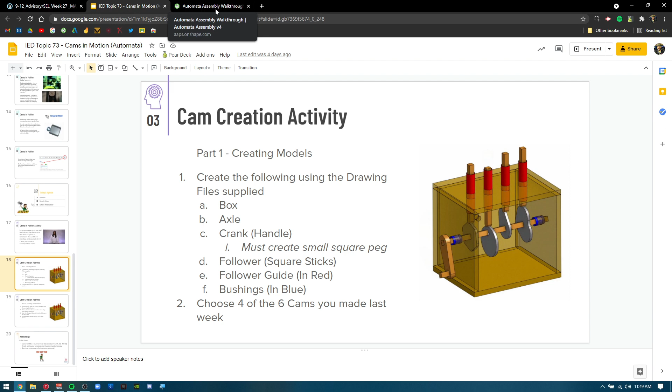So obviously I've kind of already done part one of this assignment, right? So the part one was originally create the following items so that we can animate this thing, and then choose four of the six that you were given as far as the cams.

So I chose these four here. Now remember, mine are going to look a little different because I made mine way before I made that other assignment. So my pear cam, as you can see, is a little taller. My hex cam actually has some curves here.

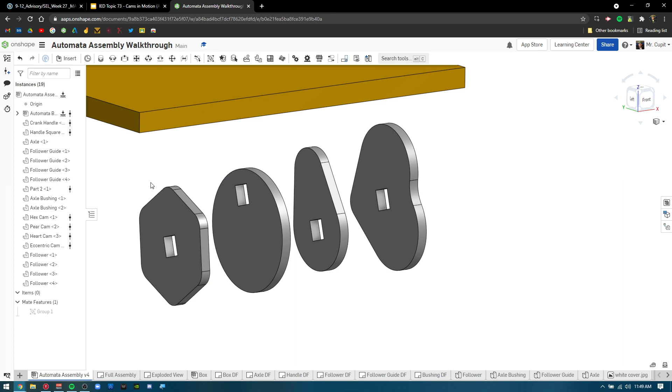If you choose the hex cam, real quick little preview or hint: if you make the hex cam, or choose that as one of the four cams of this animation, make sure you fillet the edges. That's really important. The eccentric, the pear, and the heart for this example are already pre-done for you.

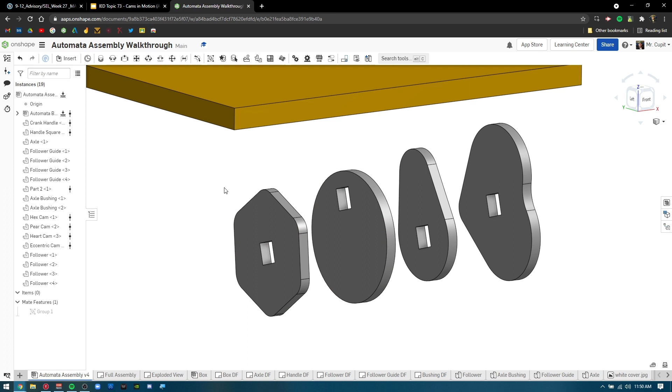But the snail cam as well might give you a little issues. You can't have any sharp edges in animations. That's really important, especially with what we call this new tangent mate. It's really important that we have a curved surface for the path to follow. So that's the first little tidbit.

For time, and just to be conscious of time, I've already put all of the parts in. I've already kind of placed them. They're not constrained whatsoever, so I'm going to walk you guys through that whole thing.

The only other thing I've done up to this point is this back plate that I put in. I made it completely fixed. As you drop this down, I did a little subgroup and I've named each of the parts. I highly recommend doing that. Make sure you name each one: left side, right side, top, bottom.

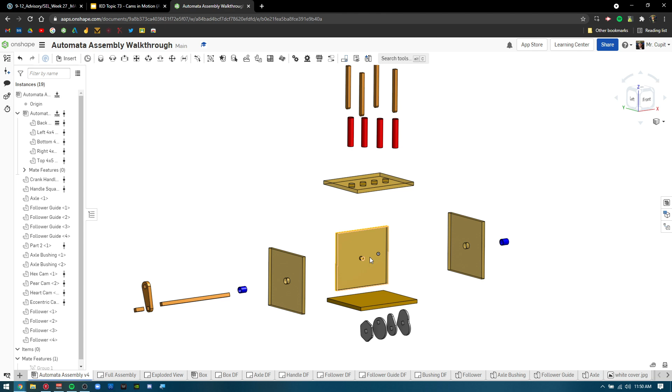Another little thing is this silly little hole on mine. Don't worry about that, you won't have that. I can't get rid of it, it's not a big deal, just ignore it. So I made the back part basically fixed so that nothing can move. That part can't move, but everything else is fully movable.

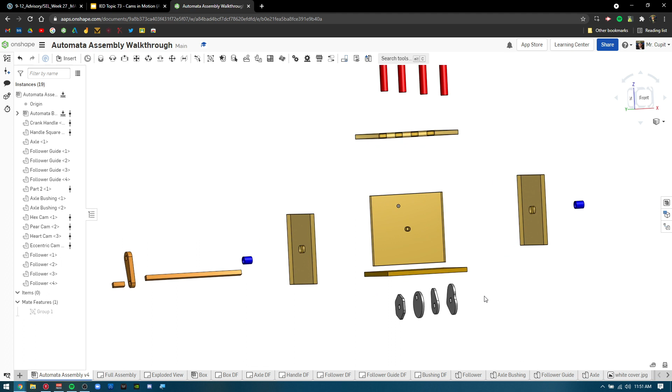So we're going to constrain this thing. We're going to make it so that this whole entire thing is together. So I'm going to start with the box, and go throughout this video and just try to assemble the thing first. After I assemble it, I'll start creating those tangent joints, and then after I'm done making the tangent joints, I will animate it and show you guys how to do all that.

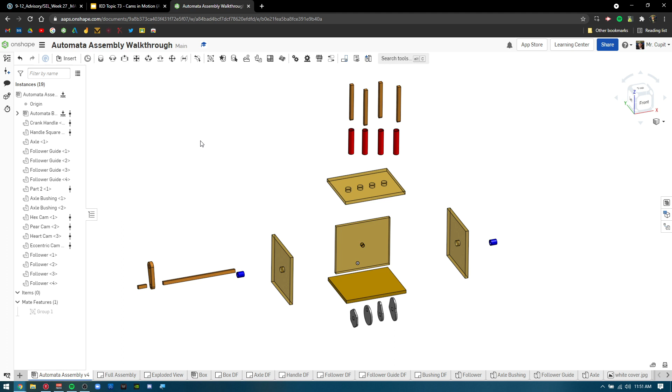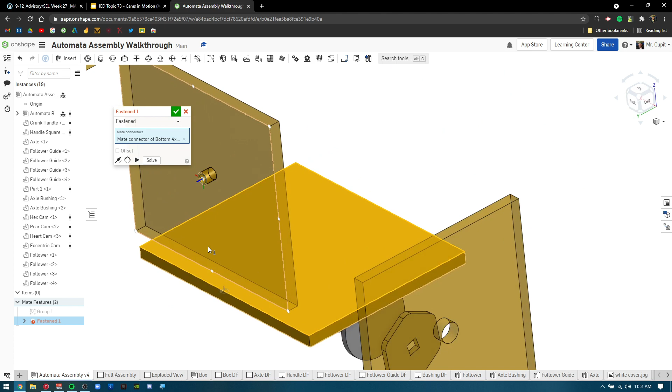So let's get started. Basically, the first thing I'm going to do is put some joints in here. So I have this part, I'm going to go to fasten for most of these. And as you can see, I'm going to use this corner center midpoint on the bottom there, and I am going to place it to actually the bottom of this box.

Rotate, try and get there. And I'm going to go to the outside edge so that it fastens there. Press solve, press the green check mark. And again, now I'm not going to get out of fasten because I'm going to use fasten quite often. So I press that green check mark and you can see I have the first piece in. I have some overhang, which is where these other pieces are going to go.

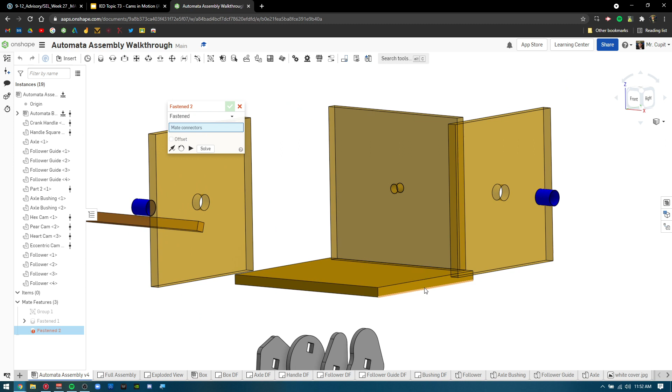So I'm going to do the same thing. Let's do this.

Didn't collect it, sorry. That to this outside one here. And as you can see, it pops in, press the green check mark, moves it over.

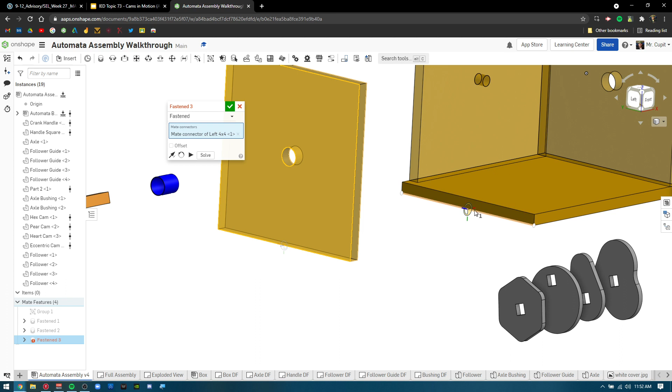Let's do the other side now. I'm using this outside node here to this, zoom in, this outside node here. Again, green check mark so that it finalizes it. And now I have four parts basically for that piece.

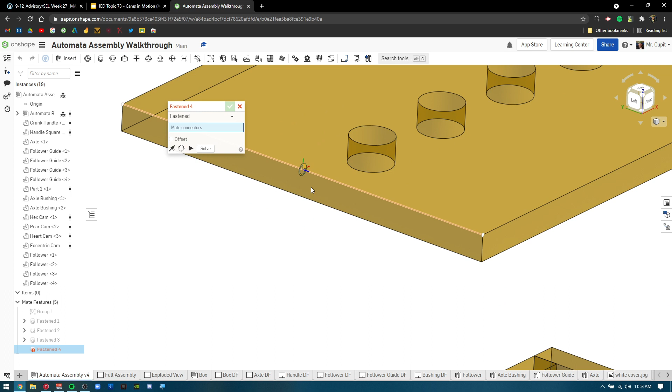I'm going to leave the front open, obviously, because there is no part for that. And then the last one, let's use this side here and bottom midpoint of that outside to the outside piece here. And then again, green check mark.

And now I'm done with fasten for at least the box. So I'll press solve, green check mark. And now you can see, even if I try and move those pieces, because that other piece is fixed, the box is good. So remember, again, this silly little hole in the back, ignore that. You don't need to worry about that. It's completely useless. So I have all my parts.

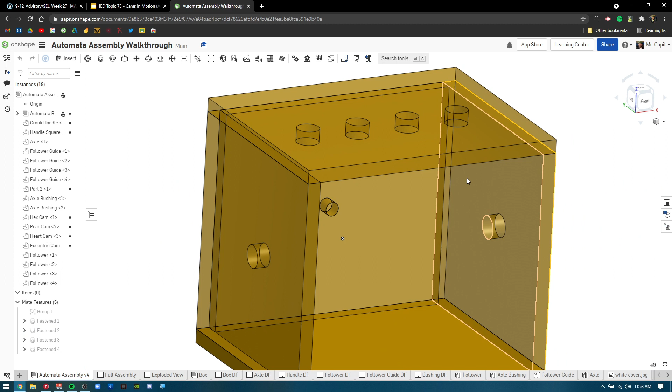Everything is fastened. I'm trying to show to you that nothing's moving, right? Okay, I'm going to go part by part. So the next thing, I will actually use fasten for these bushings.

So I'm going to use, as you can see when I zoom in here, there's 3 points. There's the outside, there's the back, and then there's the middle. I'm going to use the middle because I want it to overhang on both sides.

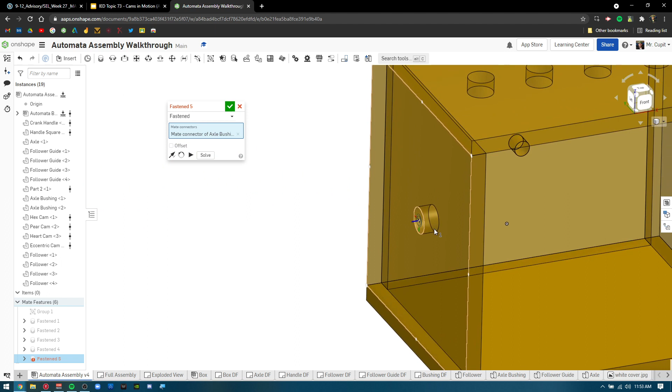So again, same kind of thing. In here, you'll see 1, 2, 3. You got to rotate it sometimes, and I want the middle to be the middle. And as you can see now, it'll poke out on each side. So I can press this green check mark, and it'll move that piece, but still leaves fasten open.

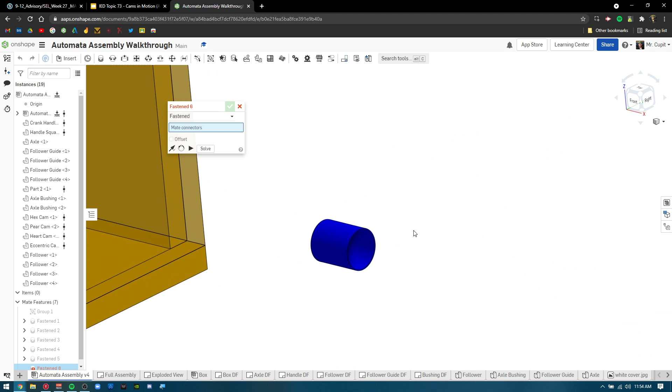Come back over here, same thing to this other bushing that it's called. Come over here and do the center to the center of this. See, sometimes you just got to move the camera around to make it work. Green check mark, and I have that fastened now. So I'm good with those bushings.

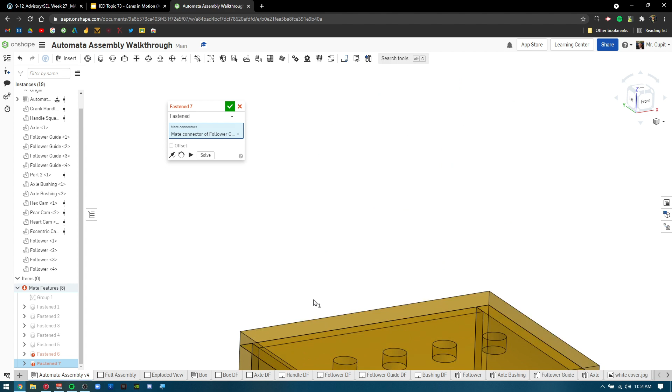Let's put these follower guides in now. So I'm going to start again, same thing. I'm going to use the center, and I'm going to use the center of this hole if it lets me. If it doesn't, I'll just use the top. Oh, it does. Cool, there's the center, green check mark. Good there for now.

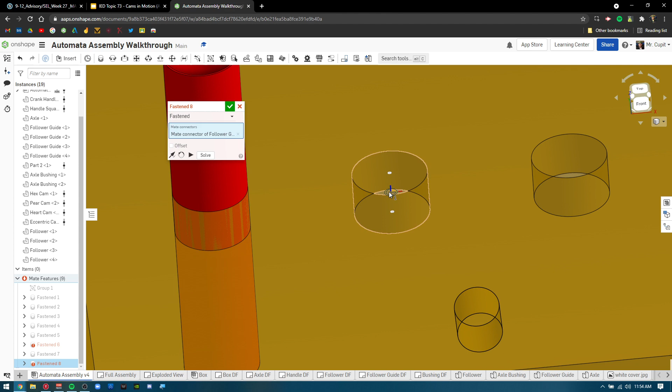Over here, push this in, put all these in just to get them done. Angle it a little bit so that I can see the center. Ooh, popped up for a second. There we go. Just have to play with it a little bit sometimes. No big deal. Go back up here.

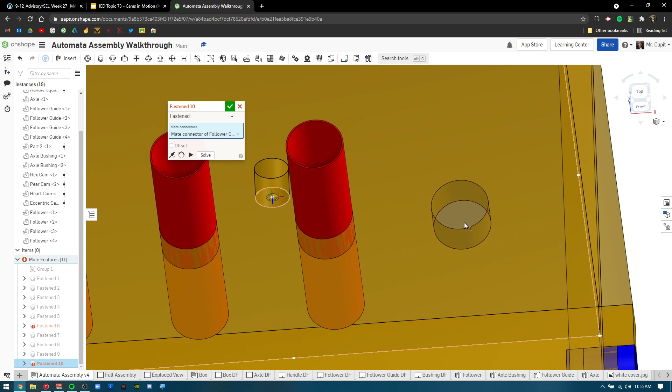Same thing. There's one. Come in, zoom in a little bit. That center one. Good. Green check mark. Red again, we'll see here. Go to rotate a little bit so that this fits in. Come on, show me that middle node. There it is. Green check mark and solve.

So now I have my follower guides. I have my bushings. Now I'm going to start kind of working on this.

Now I say this in the instructions, make sure you make this other little handle piece. I see a lot of people not doing that. Make sure you put that little handle, make this. It's just a square rectangle that's 0.25, and I extruded it just a little bit, maybe an inch, half an inch, something like that.

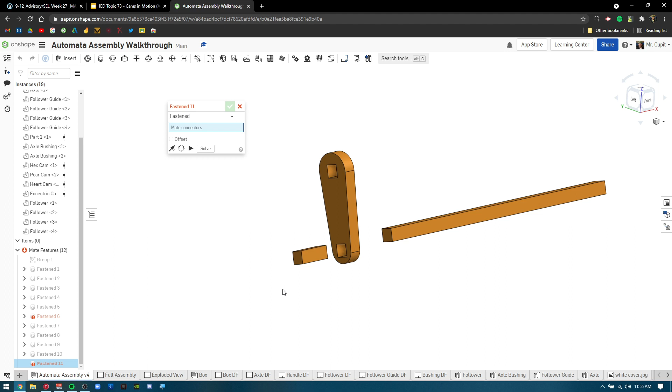I didn't make a drawing file because I figured it was a square extruded, right? It can't be that hard. So I'm assuming that you guys can do that. So make sure you don't forget that little part. And all this is a handle so that we can put that piece in the center of that piece.

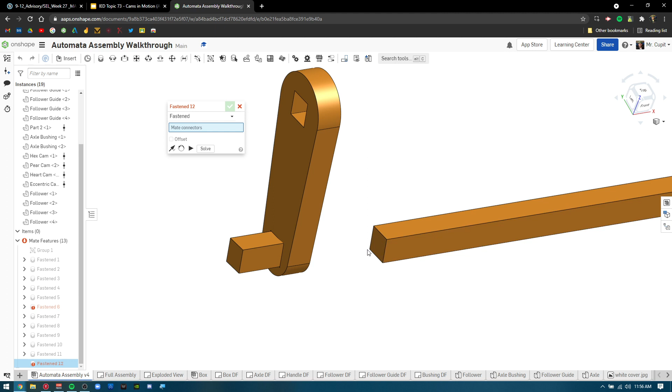Click there, green check mark, and now that's fastened in there and we're good to go. This other piece, we want to put the axle into the handle as well. So this back, click, check mark. I'm just moving my mouse around to find the right node. I'm not clicking anything special, just FYI.

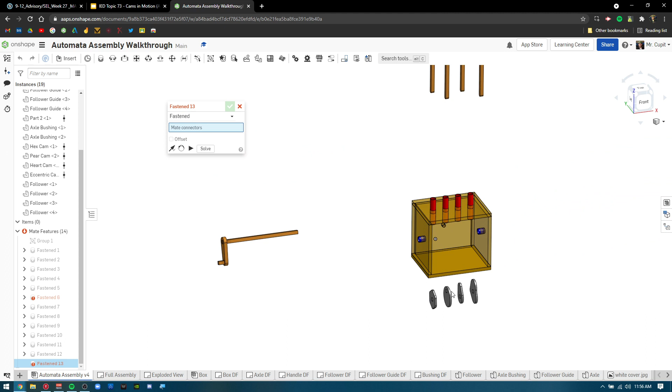Okay, so now before I put the cams in, you can do this either way. It really doesn't matter what order you do this in. You can put the cams on now and then move the whole axle inside the box, or you can put the axle inside the box and then put the cams on after. I'm gonna put the cams on after, and I'll show you why in a second.

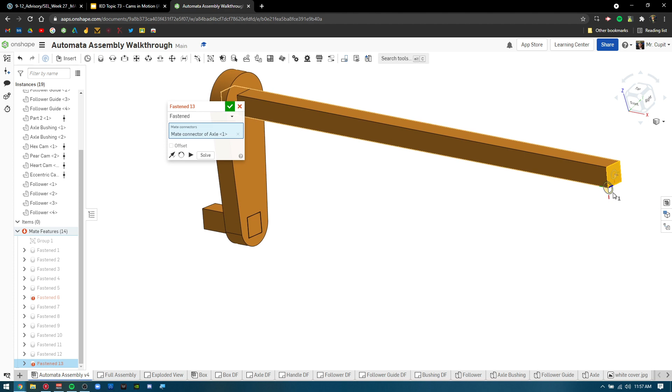So let's do this end. Let's do the center of the axle here. So I'm gonna rotate this. Try and do this face here, and maybe it'll pick up. It doesn't. That's okay. We'll do the end here. Again, I'm trying to make this as short as possible. Do the end center, and I am going to put this into the end of this. We don't want it to be a fasten though. We want it to be a revolute because we want it to rotate around that system.

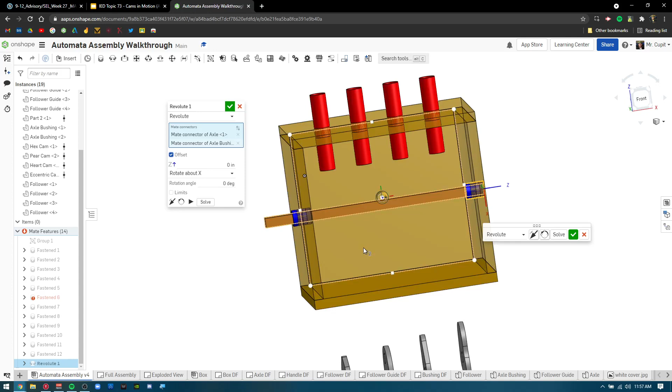So I'm going to press the offset button as well, because as you can see here, it's sticking way out on one end and it's not sticking out at all on the other end. So we want to make sure that that sticks out a little bit. As you can see here, it says Z is this direction. So I'm going to go into Z, and I want it to offset, let's say 0.5 and see what that gives me. Okay, so that's close, probably a little bit too much. Let's go 0.4, let's go 0.3, and just play until you get it right. 0.2 it looks like. Cool.

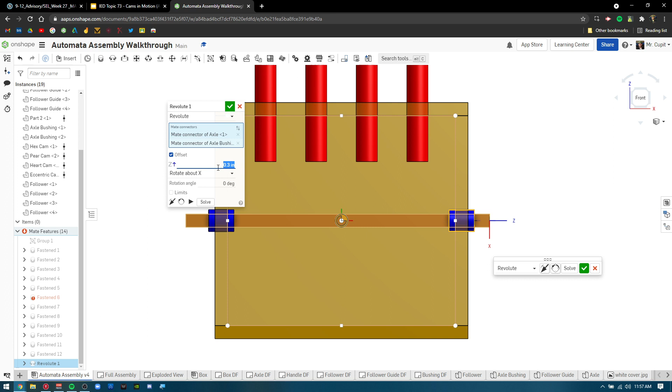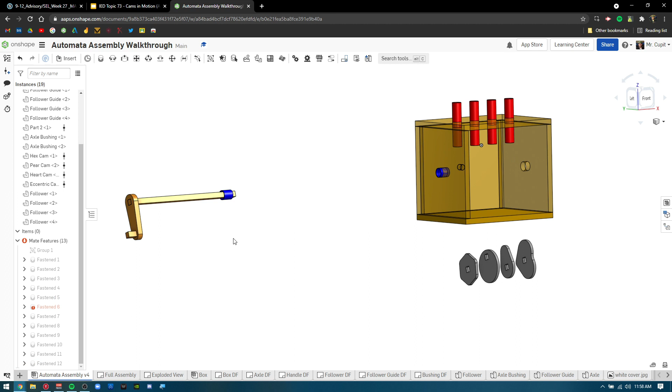I can press the green check mark now, and as I press solve and the green check mark, it should come with that system. Uh-oh, something didn't work. I picked the wrong system, so I'm going to delete that. Here we go. So what I did on accident there is I selected the wrong order. You've got to pick what you want to move, then what you want to move it to. So this piece, is that fastened? Yeah, that's why it's all messed up. So I remove that fasten, and again, you'll make mistakes. I make mistakes all the time.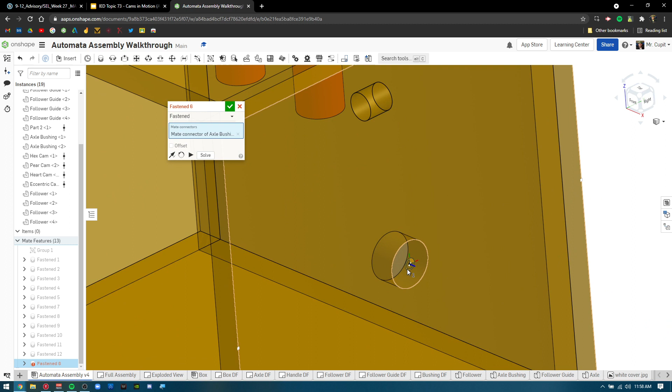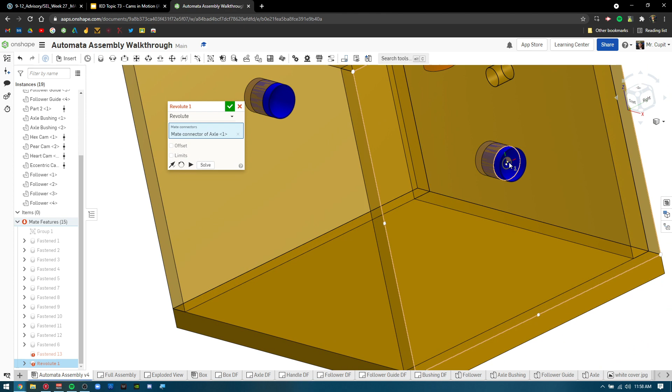I want this part to move to this piece here. Check mark. Solve, green check mark. Now we should be good. Let's check. Good. Okay, so let's try that again. Now we're going to do a revolute, and I want this center piece to revolute inside that hole. And as you can see, again, we need to offset that a little bit, and I think we said 0.2 was the key number there. Green check mark. Uh-oh, something's still wrong. Let's play it, solve, play.

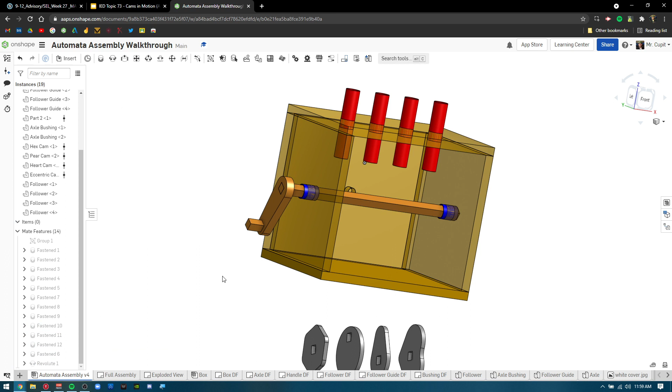Not sure what the fasten is. Seems to be working. I'm not sure why that's looking like that, or what these other fastens are. These two mate connectors, I must have just accidentally pressed fasten. That's okay, let's delete it. Let's delete this revolute 2 because there's not a revolute 2. Let's make sure it still works. Yeah. So I just made a mistake. No big deal. Just delete those. So now I have this. The box is still solidified. All the bushings are solidified. They're fastened, right? And then I have this revolute.

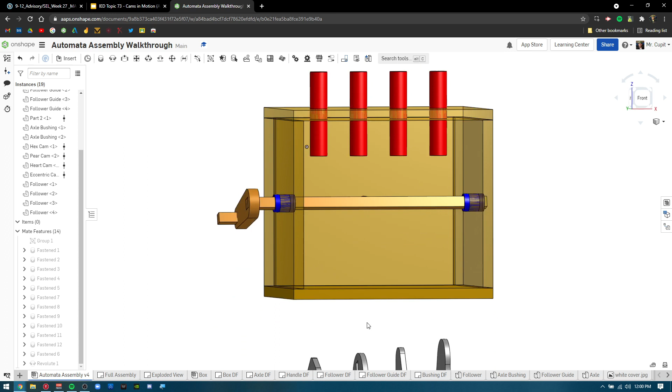So the reason that I chose not to put the cams and the followers in until the end was because of alignment. So the first thing I'm going to do is put these followers inside the follower guides. That'll allow me to position the cams directly underneath them so that I don't have to guess and then go back and change things. So let's go ahead and do a slider because we want the followers to go through the slider. So we go through here and we want the center of this to go through.

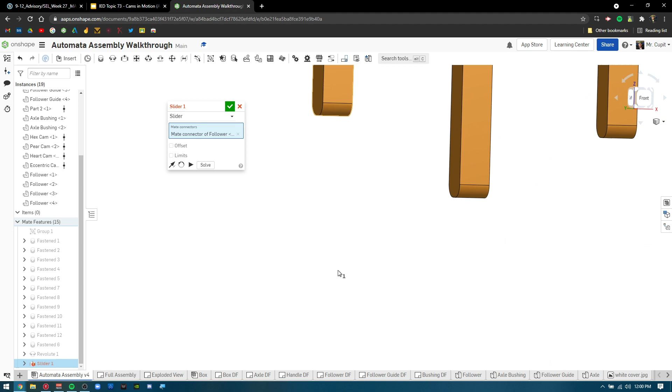You can do a couple different variations if you want. We want it to go in the center here. And you can always check and make sure; you can press play here and see what it would look like and what it does. That might help you just to get a little preview. I'm going to actually offset this up, and you can see Z again is the up direction. I want to not rotate around. I want to, let's see here.

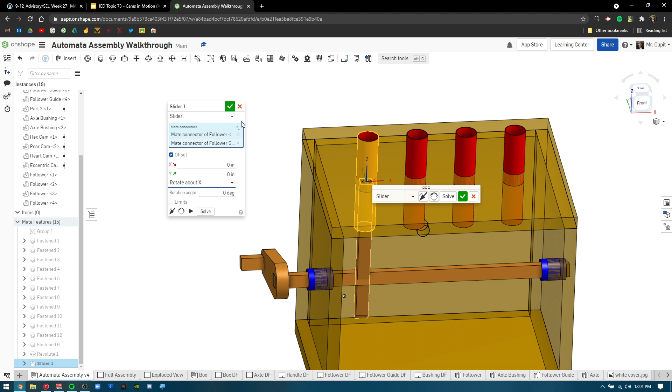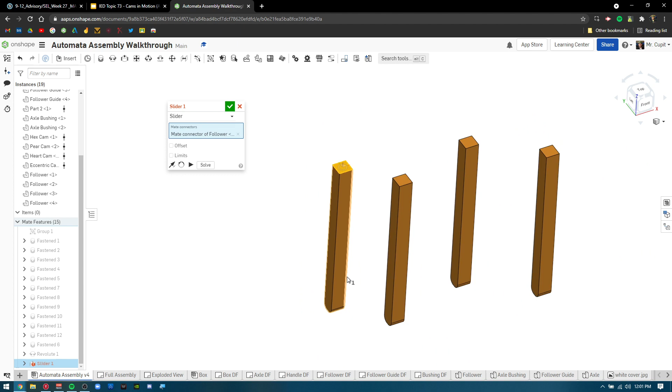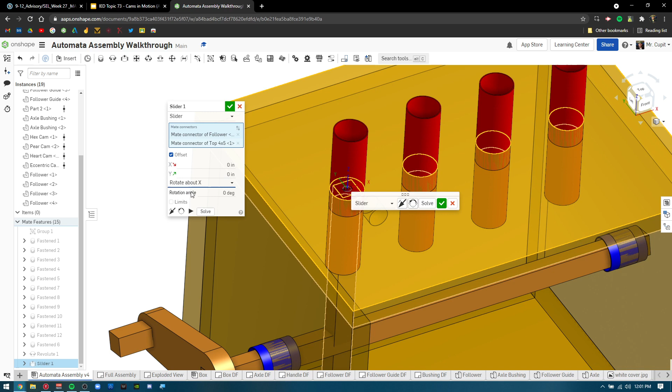Let's cancel that. Let's try and do the center to make it easy on ourselves. So we're gonna go slider. Instead of the top one, here, we can still do the top. Let's do the center here. Okay, so now we can do offset now. We want Z. Is that right? Rotate though. I don't want it to rotate. It's the offset for that. Why?

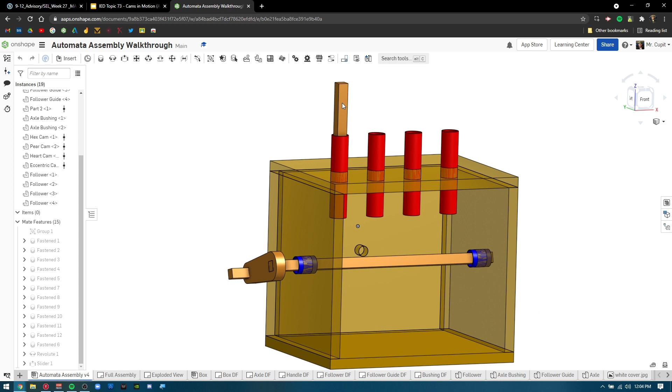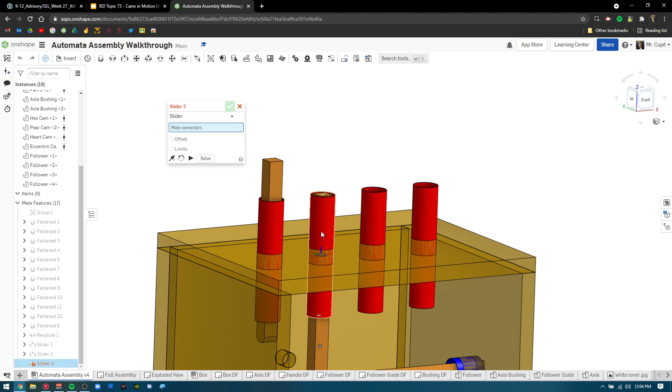Okay, so instead of offsetting, sorry, I had to pause there for a second. Instead of offsetting, I just placed it, and after I placed it, I moved it, and I'll show you again on this next one here. So just make another slider, and as you can see here, go over here, click, and then move that slider, and I'm going to put this one on the top. Click, and green check mark, and you can move these again because it's a slider. You just move it up. Works fine. Do the other two real quick here.

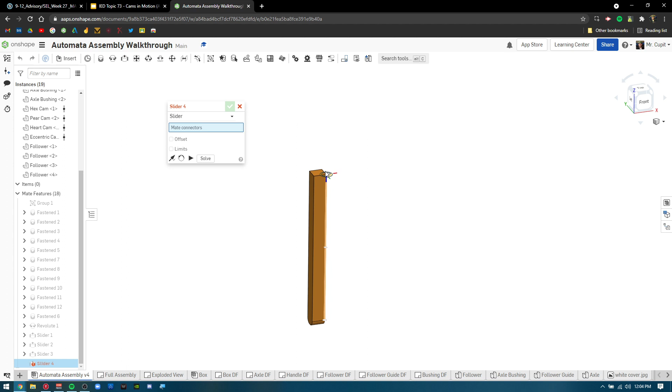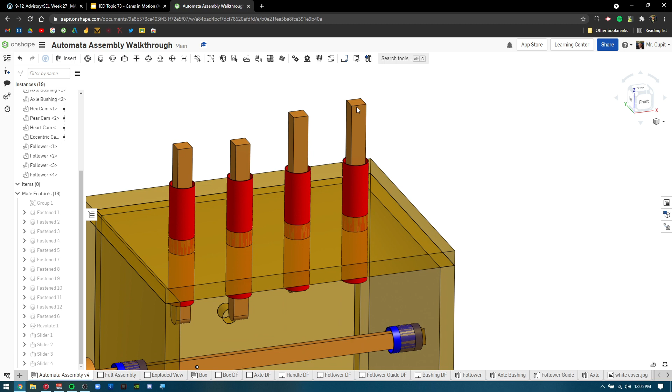Zoom in, try and get that. Center one again. Come over here to this one. Good to go. Green check mark. The last one just because I have slider open already. Top center to top. Green check mark. Solve. Check mark. That other slider, I put too many, sorry. Move those up a little bit, and all I do is I pick them up and I drag them just so that they're out of the way so that when we put our cams in, they're not interfering at all. Just a little bit. Okay, so now we can put our cams in.

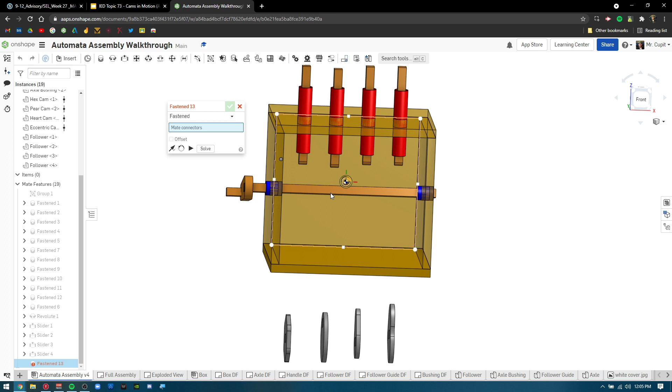So we have these systems, and again, remember where they're squares, they slide right on, and this is huge for offsetting. It shouldn't be that difficult. And we're going to show you here. We want to fasten these cams to the axle. And the reason is because we don't want them to move. We want to rotate the axle, and these are going to be attached to the axle. So we're going to choose this outside surface here, the center of that. And then I'm going to select actually the center of this axle here. So we're going to go here.

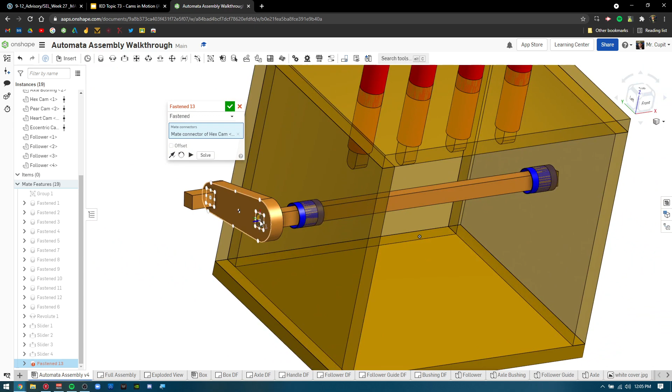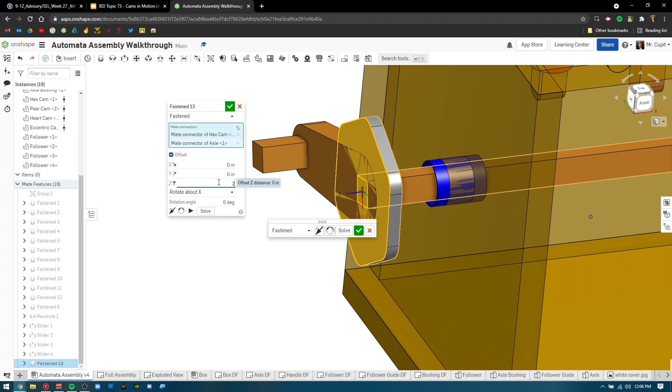You might have some problems, and if you do, I'd say make it easy on yourself and just go to this outside here. And you can see obviously it's way off. So we're going to have to offset this. If you look at the orbit here, you'll see Z, Y, and X. It's on the Z path. So we're going to move this over approximately 2 inches. And this is, again, just a guess, and it's the wrong way. So I'm going to go negative, green check mark. And I'm going to go to the front view so that I can try and line this up. So we want a negative, but obviously that was too much. Let's go 1 and see what direction.

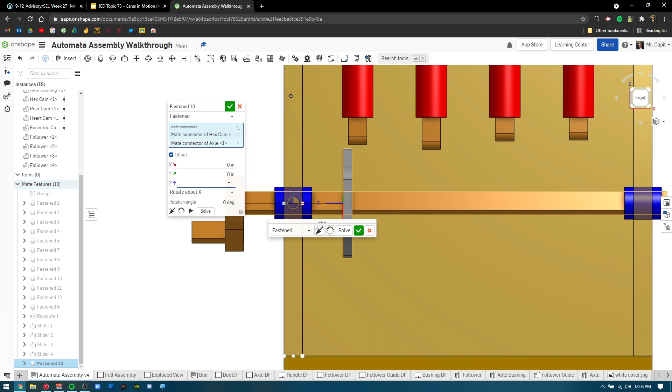Okay, so negative 1.5, let's say. And what I'm doing is I'm playing with this number so that it lines up directly underneath this follower. So let's go 5, 5. So every person's is going to be different, depending on where you pick, depending on what node you choose, all that kind of stuff. I'm going to go negative 1.75, I think is my number. There you go. It does not have to be directly in the center. It can be close, like I see here. And I'm going to press the green check mark. And I'm good there. So I'm going to do the next fasten.

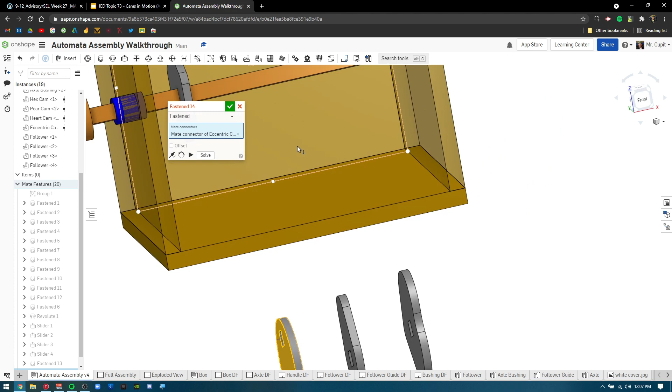And now I'm going to use that original cam to offset from that. And I'll show you why in a sec, because it's going to be way easier. If I choose here, it'll look like it overlaps that. But if I go to offset and again do a Z and just do 1 inch from that in the negative direction, you'll see here that it makes it exactly 1 inch apart, which then puts it in the center of that one. So I can press the green check mark, do another fasten again.

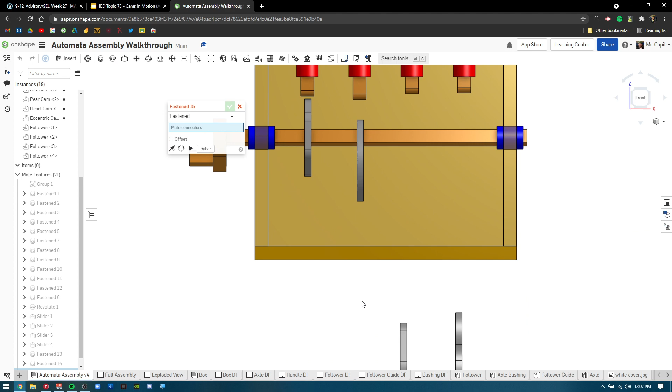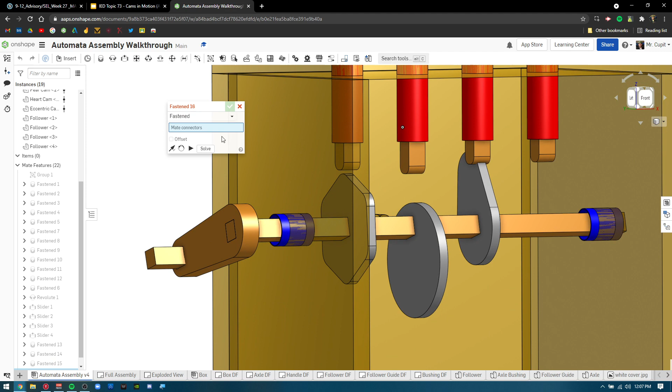Again, choose the center, choose the outside of the cam I just put in there. Again, it looks like it overlaps, offset, Z, and we're going to say negative 1 so that it looks like that. Green check mark just to make sure. Yep. And you'll see that it overlaps and it'll cut in. We'll fix that in a bit here. I'm going to go ahead and do the last fasten.

Center. Outside one. Check mark. Offset. Z, 1 inch again. Sorry, negative. And again, it overlaps. It's okay. Solve. Green check mark. And now we are good to go.

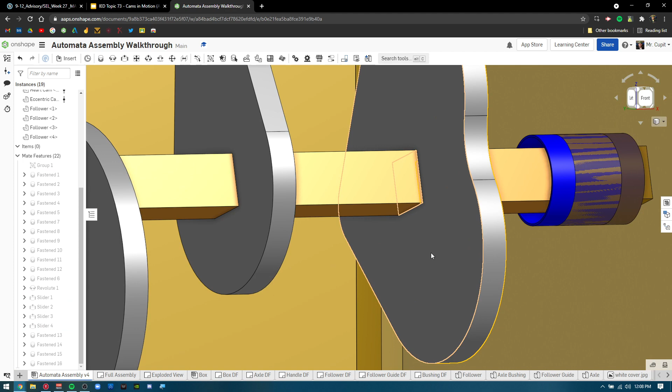So again, we've got to move this up a little bit, just so it doesn't hit. This one, I would rotate the axle so that I can see the highest point of each cam. So here is one instance where the follower and the follower guide are a little off. So what I need to do is find where I made it, and I'm just scrolling over, and you can see, boom, it turns yellow if I select the right fastener.

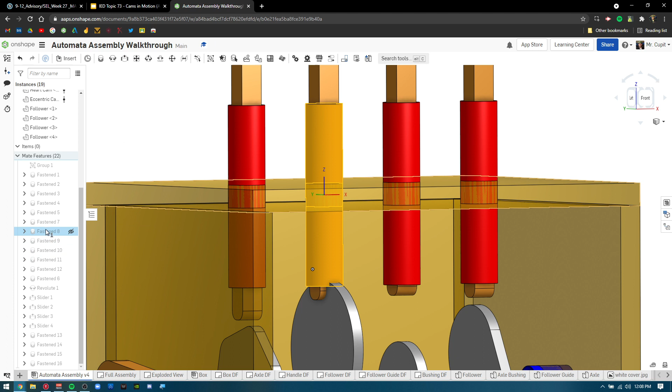I'm going to double click that. And now I'm going to offset it. As you can see, in the Z direction I'm going to offset it up a little bit so that there's clearance there. That's a little too much. Let's do 0.25. That's pretty good. And I'm going to press solve and green check mark. And you see that that moved.

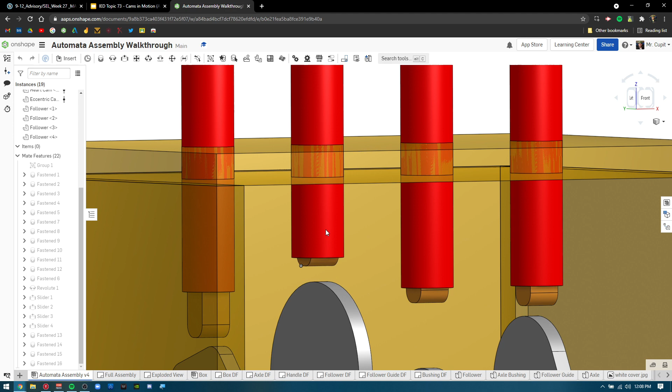Now I can just physically move the follower up because it's a slider, not a fastener. And it looks like the heart, that's the highest point. We're good there. Let's rotate this all around. I'm just dragging that. The clearance for the guide is great, and I can pull this down just so that I can see that, and we're good to go.

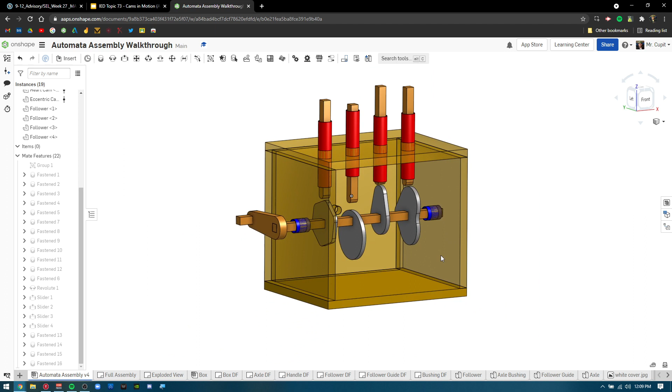The eccentric was already set. So it looked like I only had to move one of these follower guides. You move as many as you need. Again, it all depends on what cams you use, where they're positioned, all that stuff. Okay, so now we have the whole entire thing assembled, right? Let's go into the animation part now.

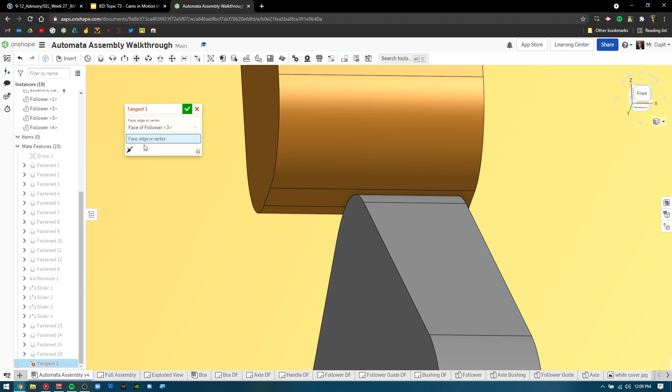So, tangents. This is where you're going to start adding tangent mates. A tangent mate basically allows a surface to follow a path. And this is why we made these little curves at the end: you'll see this little plane underneath here. It's easier if you use that little plane to select the first vertex, and then you can select the edge that you want it to follow. So I'm going to select this one, and it'll automatically fix the rest, and you can see it clicked in and started to touch those pieces, which is what you want.

Press the green check mark, and now you can animate this or just manually animate it as you move the axle here, and it'll be a little glitchy. It's okay, because when it animates it kind of fixes itself. But I'm going to rotate this really slowly. Let's see. Try and do this.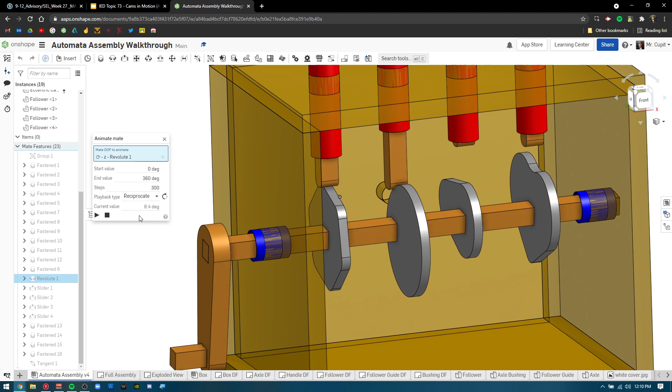Let's go to the Revolute. So just to make sure it works, I'm going to go to animate. I'm going to leave everything alone and just press play. And you can see as I animate it, it automatically renders and fixes that for you, and it's following that path. Obviously it's not going all the way around, we'll fix all that later, but I just want to make sure that was working correctly.

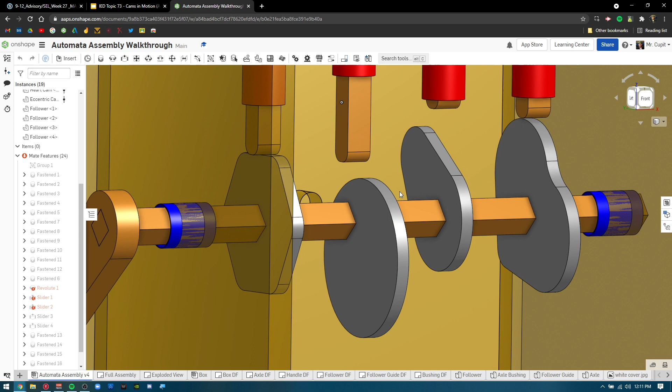So let's do the other ones. We're going to go to tangent again up here. You're going to select that little plane, that little surface right there, and then we're going to select this outside path where you want it to follow. Green check mark. It didn't connect for some reason, which isn't cool, so let's try and fix that.

You can see some things were happening here, so I'm going to delete that second tangent. We're going to fix that. So we're going to go to tangent. Let's try, and now instead of using that plane, let's still use the plane. Let's see, maybe I just did something wrong. Oh, it's not connecting here.

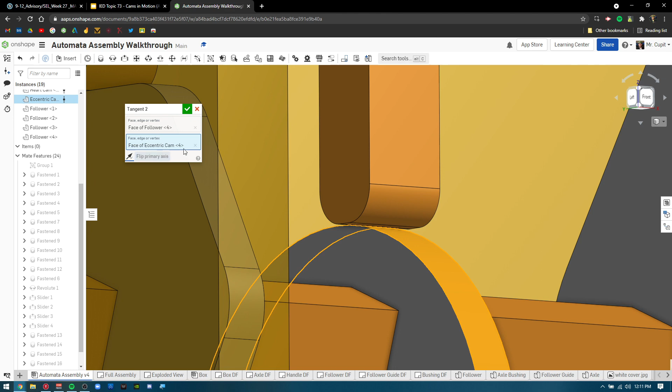Switch it. There we go. So you see I flipped the axis, and that allowed it to switch the way that the software basically recognizes the path. So you just press on that one. I had to press, and sometimes you just got to flip the primary axis. Press the green check mark.

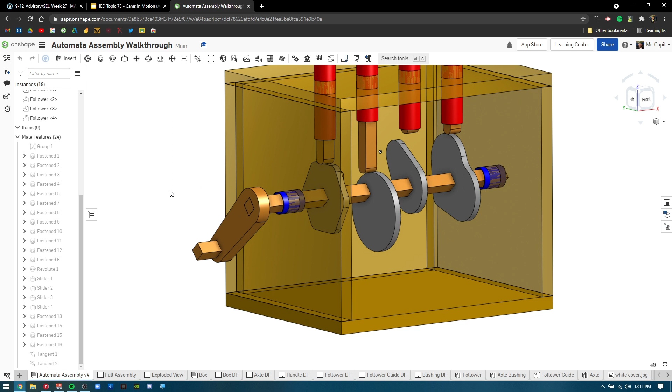And now I would recommend as you do each one of these, test them. You see that kind of sticks. So I go to Revolute, I right click, and I press animate, and just press play. And it says unable to compute any steps and constraints. So there must be something wrong here. Let's see here. I'm going to try that other one again. And as you can see, it's starting to work now, and it's following that path.

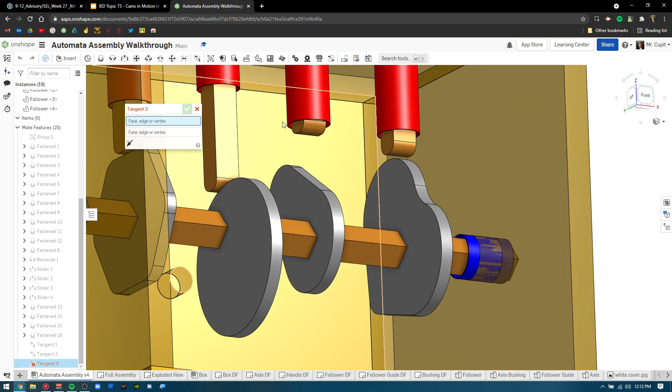So now I'm going to do the same to the other ones. I'm going to do tangent here. Press tangent. Press that bottom plane. Press the surface that I want it to follow. It clicks, so we're good to go. I can press the green check mark. And again, test it. Go to the only revolute that we made, basically the axle. Animate. Press play. It's working so far. Looks really good. It's only going that far, but it's moving all those pieces.

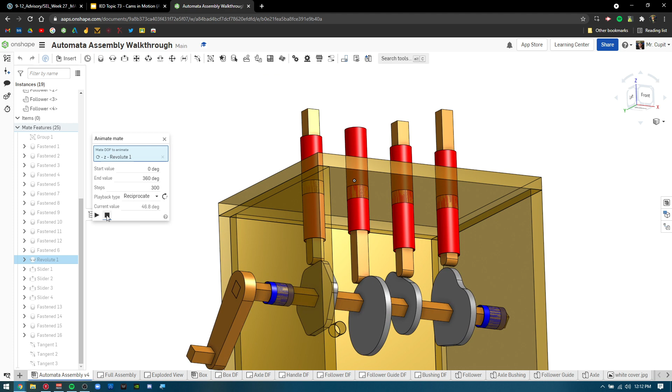And then the last one we have to do. So we go to tangent. Press that little plane at the bottom there. Path we want it to follow. It moved. You saw it kind of jerk, and it's touching that piece. Press the green check mark. And now we can do the final test and the final animation, and we are completely done.

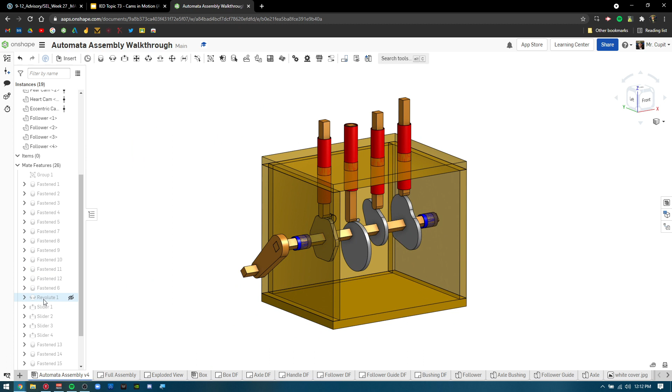So as you see right here, I'm going to go to Revolute. Click Revolute. I'm going to right click and go to Animate. And it'll bring up a whole bunch of new dialogue. You can do only one rotation. You can do 300 steps. Basically, the number of steps, you can make a loop. That's what I would recommend doing. And I would say 0 to 360 degrees, which is one full circle. But I'd increase the number of steps. So let's say 1,000. And when I press play, you'll see eventually...

Unable to transform. Instances may be constrained. Let's try it again. Revolute, animate. Let's just try by itself. Something is messed up. So it's okay.

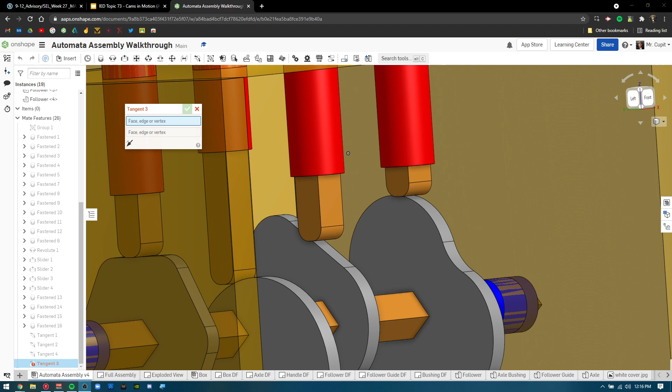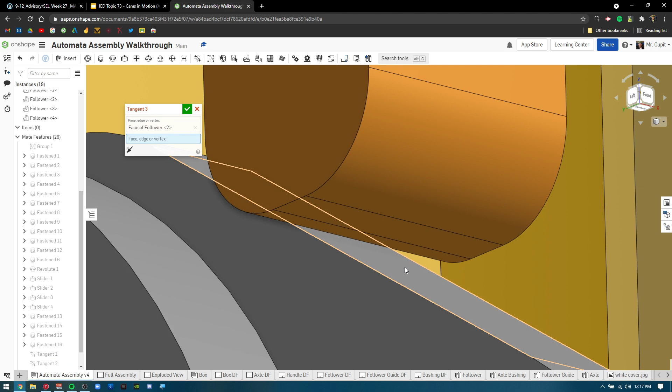Okay, so the issue that I found here, and you might have the same issue because I was working with different ones. Do you see how this plane is not touching this part? And it's actually this curved piece that's touching that part. So that's kind of important. So what you need to do is when you create this tangent constraint, you need to choose basically this outside curve to this piece, and that should solve the issues.

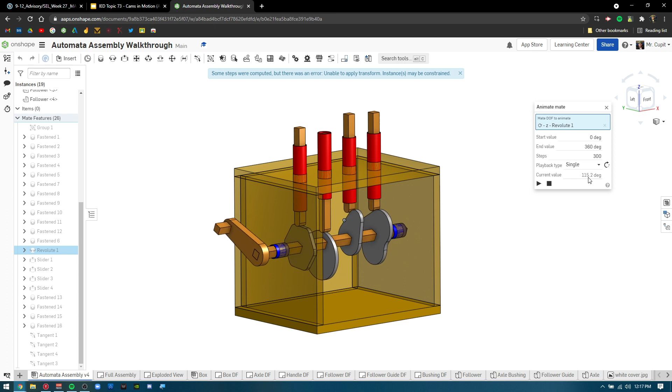I did it already to the heart one, so we have 4. Let's make sure that that works, and then I'll go over everything. So I find the revolute, I press animate, press play. And as you can see now it works. And you can change all these instances to go a little bit farther if you want. Press play. It'll go a little slower basically. So you can say 360 degrees. You can play with all these. You can make it single, and it'll show the current value of where it's at. And as you can see, I can make it loop.

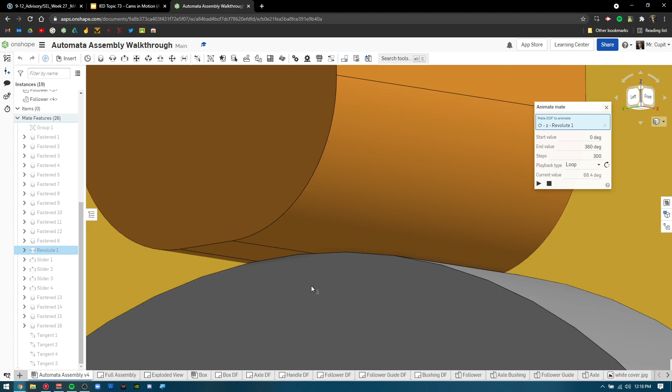So as you can see, the difference was, and I'll show you again real quick just for the sake of understanding, some of these, the corner will touch this surface, not the plane, whereas some of them will touch the surface and the plane. So it really depends on that first selection you make. Your cam depends on what you select.

Again, this one, it looks like that flat plane is going to touch it the whole time. And this one I changed because it had to be the outside corner. So make sure you choose the surface that's going to be touching the cam profile the most before you press animate. So I hope this helps.